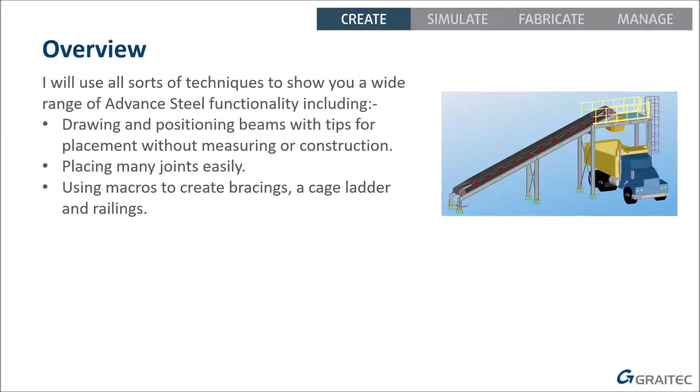You can see your base plates and bracings and various things, so I'll create all of those and show you how easy it is. I'm going to use macros to create the bracings, and use macros to create the ladder and the railings and so on. So again, large chunks of complicated but predictable geometry we can create very quickly.

Doing this whole model in its entirety is going to take around 50 minutes, give or take a couple of minutes. So I'm not going to go into a lot of depth about creating the drawings today. If you want to see more about creating drawings and things, we've got plenty of other presentations with more information on how to do that. But I will show you a quick overview of the kind of drawings you get at the end after I finish the model. So you'll see a little bit, but I won't go into it in depth.

Okay then, so let's get ready for the actual demonstration.

So this is the model that we're going to be aiming at to create. We've got the dump truck and we've got a conveyor belt taking materials, rubble or whatever, up to the top, dropping it through a hopper into the back of the dumper truck. Then we've got an access ladder to get to the top if you need to sweep down the hopper.

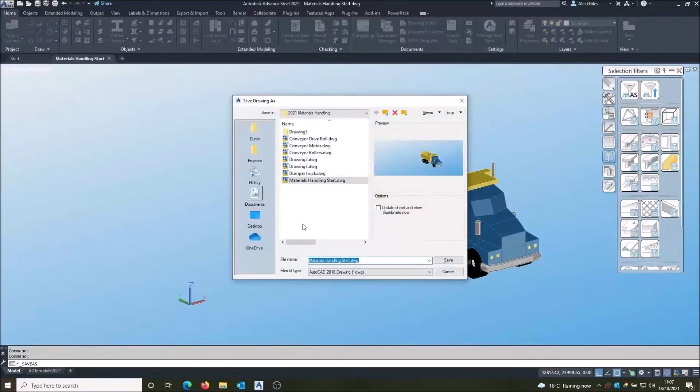So here's my starting point. I've got the dumper truck in place, and I've got my origin over here. I'm just going to do a save as there. And away we go - so I've got the construction lines in place. Let's turn those on.

So here we go. We're going to have the hopper here - these shapes here for where the hopper goes. And we're going to have this conveyor belt coming up here to drop things, rubble, into that hopper. Then we need a platform with some legs in these positions. All good.

So the first thing I'm going to do is draw most of the conveyor belt. I'm going to need to draw the sloping beams first of all. So let's get my UCS on the slope - I'm just going to use UCS at 3 points because it's construction lines, and it can't snap to an object.

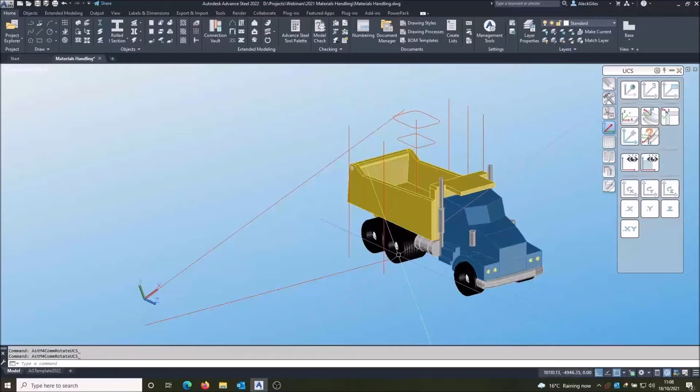And I'm going to go to the end point there, end point there - that gets my X correct. And then anything else on the plane, so end point there. Okay, that's got Y pointing down. I'd like Y to be pointing up, so let's rotate. Like so. Great, I can draw the sloping support beam.

That's going to be a big bit of channel, so I'll go straight for channel. I'll draw it from the bottom to the top.

There, because I've got my UCS all the way around. I'm going to put that on the corner, and I want that to be a nice big bit of channel, so I'm going to go for something hefty - I'll go for 300 by 100.

Now, one quirk with channels - if I put the positioning to top middle, because I want that in the middle of the flange, it doesn't go in the middle of the flange, it goes above the centre of gravity. A bit annoying, that. So I can't use that top middle position. So although I normally say never ever put a value in the Y or Z, what I'm actually going to do is put it onto the corner and then put a value in Y of -50, and that moves it to the middle of the flange accurately.

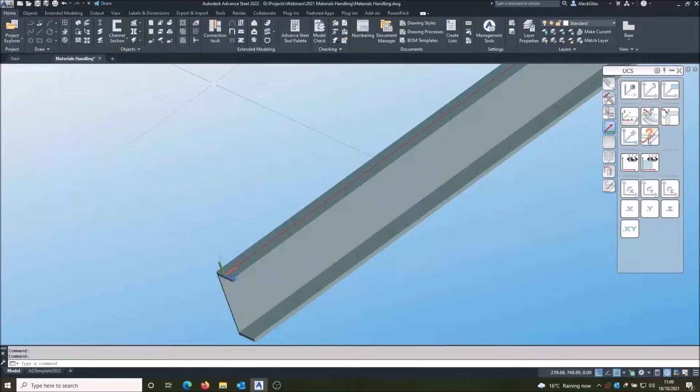Let's get my UCS the right way up. Okay. Now that's the centre line.

So we'll need to move that out in a minute. I don't know how far it's moving out yet, so let's put in my rollers. I've got blocks already prepared for the rollers, which I've nabbed from some mechanical equipment manufacturer or supplier.

So I'm going to use special parts. Here we go. I'm going to go for the top of the construction line, and I'm going to insert or browse to the block I want. And there you go, let's put the block in there.

I'll put another one at the bottom, same block, like so.

And then I want to put in the intermediate rollers. They're going to be slightly different because I want the belt to create a trough shape. So I'm going to put it at the top again because that's the only reference point I've got, and I'm going to use the conveyor rollers.

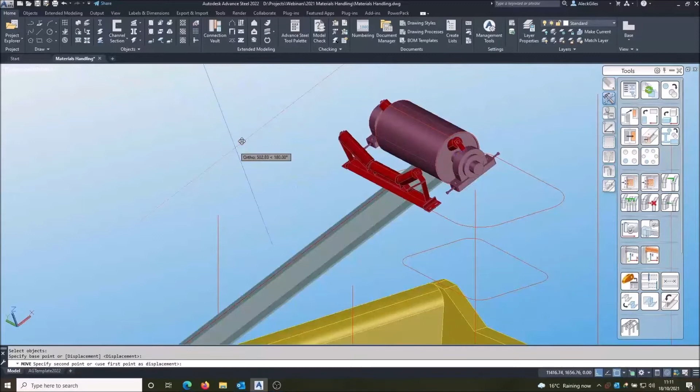So I'm going to put one at the bottom, and I'm going to move that one up 1200, like so. So that's got either end.

Now I want 10 sets of those rollers. I've got 2, I need to divide the space between them equally. So what I'm going to do is just draw an ordinary construction line, temporary. I'll go from a nice easy snap point - if I go there, I'll get the corner of the roller, or the quadrant on the corner, and I'll go to an end point there. So that's the distance between them.

I can use the ordinary AutoCAD divide command to divide that length. If I want 10 rollers, I want to add another 8 in the middle, so I need 9 segments on that bit of line. And that puts AutoCAD points along that line.

So I need to change the point to something I can see. Let's change it to a nice big symbol there. There you go, I can see the points.

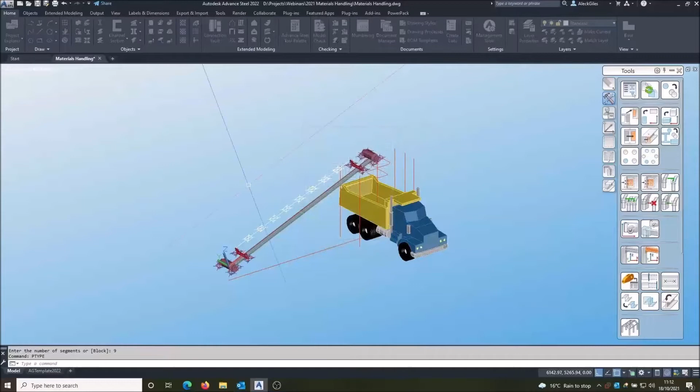So now I can copy those blocks, just use Advance Steel Copy to all those different points. So I'm going to go from the end point of that - I think I missed, let's try that again. Copy that from end point to there.

Marvellous. So now I can select those points, don't need them anymore, and get rid of that line as well. So I don't know what the gap is, but I know they're equally spaced.

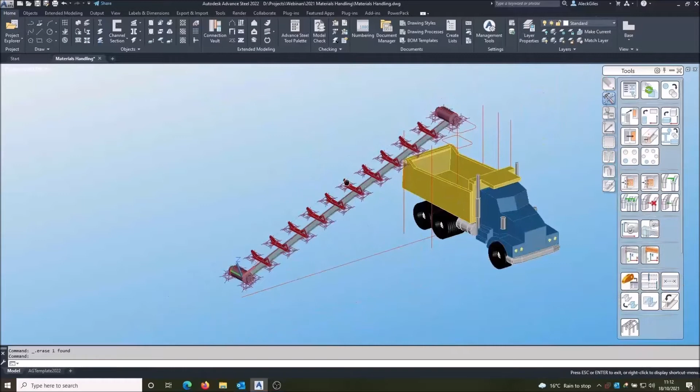Now that beam needs to move out. So I can just do a move from there to there. Needs to be a bit longer to accommodate the fixings there. So I'll move around - can I get the grip to come up?

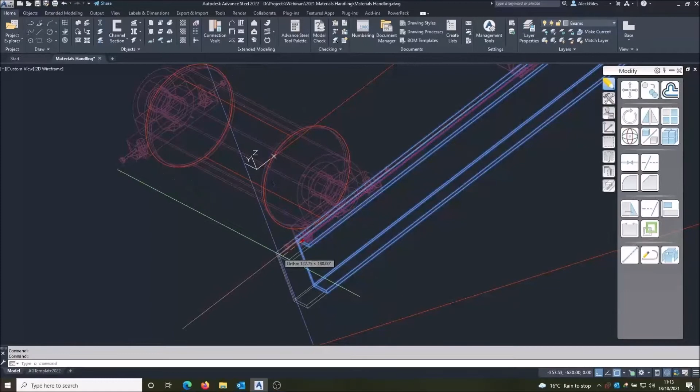No, let's go to wireframe then. There's the grip, and I'll extend it 300. And the bottom I'll extend a bit as well. That's better.

Now there's no point in drawing in the other side. I'll make everything on this side and I'll mirror it later. So far so good.

I'll bolt those rollers to the beam. That's straightforward, I just need to check my UCS is in the right position - yeah. So I can use the bolt group. I'm just going to put in one bolt at a time. So I'm going to go for a rectangular corner point, it's the easiest way.

Choose the parts to bolt together. And I've put a node inside the block - what I've done, I've put an AutoCAD point inside the block at the relevant position. That's useful to me, and then I can snap to that AutoCAD point using the node snap.

So I've got a node in the middle of that bolt hole, got a node in the middle of that bolt hole, and I've got one on the center line of the roller. So I'm going to use this node here. I just want one bolt each way, and it's going to be a chunky one - an M24.

And I will simply copy that bolt from there to there and confirm it's that block. And then I can copy a pair of bolts, center like that, all the way up to the center line there.

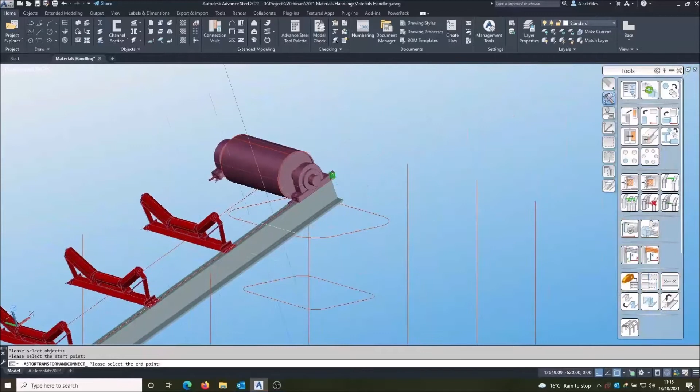And there you go, similar for the intermediate rollers. So I'm just going to do a rectangular pattern between the roller and the channel. It's going to be there, and this time it's going to be M16.

I'm going to copy that from there to there. And then I'm going to copy the pair, I'll use the bottom one as the reference. There, click. There, click.

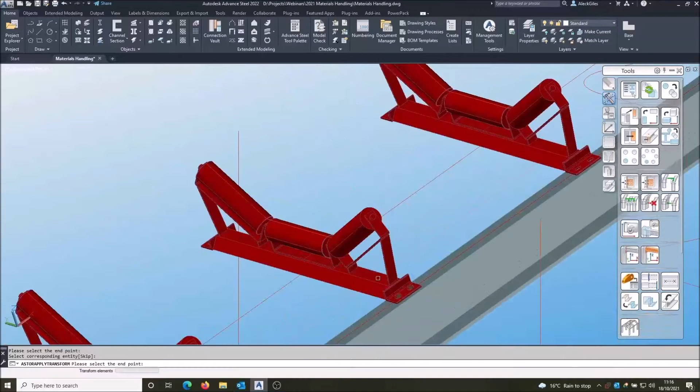So we've got half the conveyor belt in. I'm going to go back to the world coordinates now, and it's time to start putting some support structure in.

Let's reduce all those points so we don't see them all the time. Type in the command P-type, and I can put the points back to being just a dot. Okay, and that hides all those different points. It's nicer, tidier. So I'm going to put in some legs and support for that conveyor.

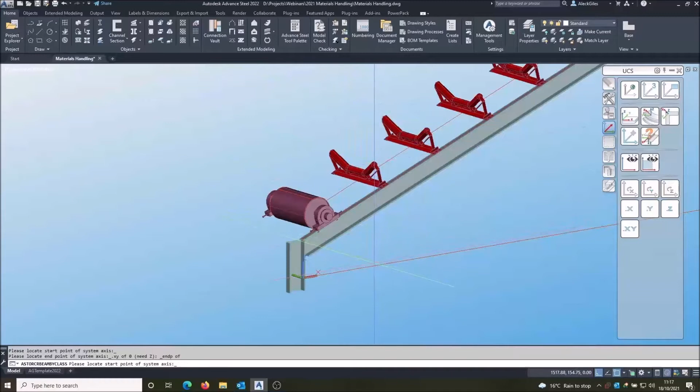So it's another leg here out of channel from the end there. I don't know what the exact height is I want to go, so how do I get it down to 0 level? The easy way is to use the Z direction, so I say dot Z - that way I'm only going in the Z direction - and then I can snap to the end point on the end of my line on the ground. Then I check all the items like positioning and so on to make sure that's in the right place.

So that one's done. I need one in the middle of that conveyor, so I'm going to do the same again. I'm going to snap to midpoint, making sure it's the middle of the system line. And again, I can say dot Z onto the end point of my floor line, and it goes down to the floor. Again, double check the positioning - this time I want it in the middle. It doesn't always remember these values, so I type them in each time. That's fine.

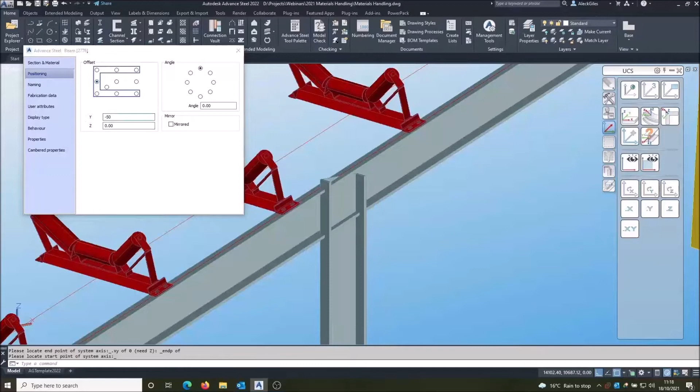Okay, marvellous. Now I've got to put some joints on them, so I'll go to connection vault. It's very easy to do the base - that's going to be a base plate. Don't worry about concrete. I'll have a 400 square by 20 thick, and that's in the library, so I'll just go to the library - 400 square, 20 thick.

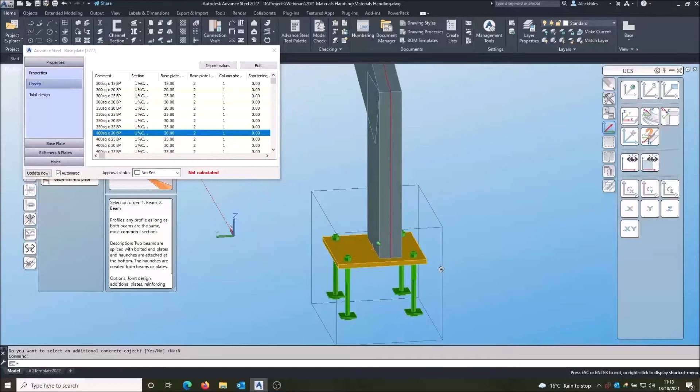300 channel, so 400 square for the base plate's reasonable. That's fine, but that's off center, so we need to get that centered. Now the default center position it's choosing is the center of the web of the channel, not the back of the channel. So I can't just move it across by 50 because that will move it the incorrect amount - it's going to still be off center.

I need to know what the web thickness of the channel is, so I can double click on the channel, go to properties, and it tells me S web thickness is 9. So that gives me 4.5 as half that web thickness. I would move it 50, but it's already across by 4.5, so 50 minus 4.5 is 45.5. So I need to move that by 45.5.

So I'm going to go back into the joint, and on the dimensions page I can offset it. Trying that one, 45.5 - okay, so it's gone the wrong direction, so it's not that one, 0 back in there, try the next one, 45.5. That's it, okay, so that's parallel to flange. Now bizarrely the bolts always seem to be the opposite one, so I'll try bolts parallel to web. There's an offset there, so I'll try 45.5 there. That's good, that's gone the right way.

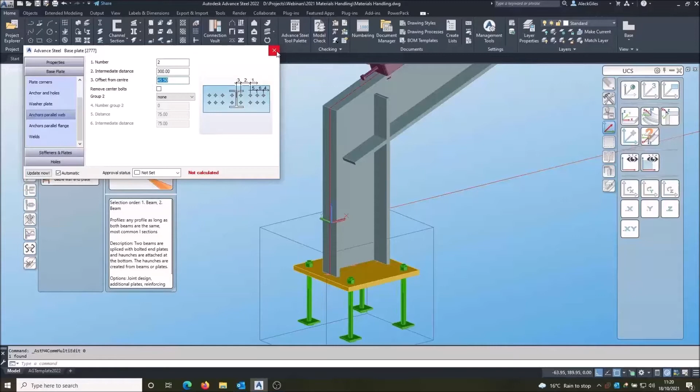So now it's in the centre, I can now do a joint copy on that one, to put it on this leg, and it stays in the centre on that leg. At the top, then we can use a nice joint called the gable wall end plate. You've got a preview here, it puts a plate underneath the cross beam on the end of the column. So that's what I want. So let's pick the beams, and in it goes.

Not quite set up right, so what I actually need, I only want one row of bolts. No, one there. I want 3 actually in that direction, and I'll change the spacing to more like 90. That looks better. This collar beam will be extended in a second, so that's decent spacing.

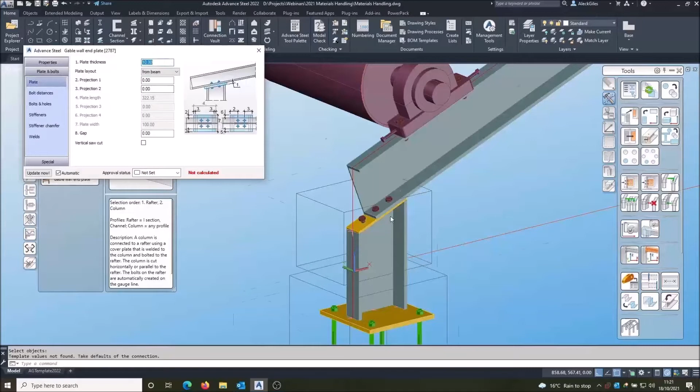I want to make sure the plate matches the size of the channel. So projection 0 all round, so it's going up to the edge of the channel.

That's cool. To get this channel right, I just need to do a cut object to make it reach the back of here. I don't know what to add or how to do it, but if I do cut object, I want to cut to the leg and I want to trim that channel. But I don't want to trim to this side, so I change the cut side to the rear, and now it extends to there.

This joint is fine, so I can do a joint copy again. Get the right piece in a minute, there you go. So copy that joint with that plate. I'll put it on this leg, so it's that beam, that leg, and let's put it in. Lovely. So that's coming on well.

Now we can mirror those items to the other side. So I'm going to go to transform elements. I'm going to say I want to select the objects. The main bits I need to select are the 3 beams that I'm interested in. In fact, I don't need to select anything else manually. I can just select those 3 beams.

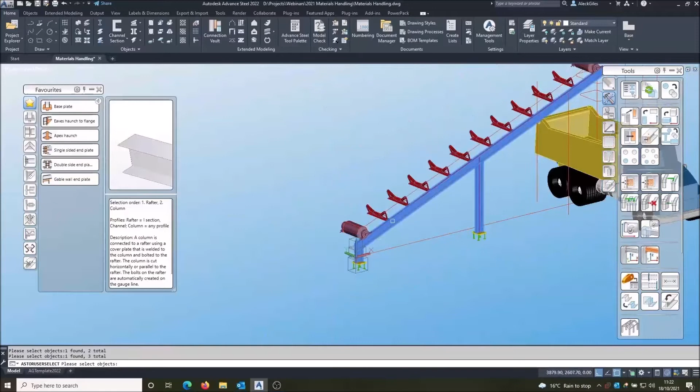And then I say include additional connections, and by doing that, it automatically finds all the bolts and all the joints that go with those beams. And then I've got to remember to make sure I say it's mirror. And because it's 3D, I prefer to use the 3D version of mirror.

My mirror plane, I've got select points on that, so it's mirror. And it'll be endpoint on the diagonal line there, endpoint on the diagonal line top, and let's go for the end point of the horizontal line at the bottom. So I think I've set that up right. I can click on the preview button, and it does the mirror. Yeah, that's all looking good.

So I can... hang on, it's asking me to confirm something. Oh, where's that beam? So I can say I want to do that one. These are going through the same members.

Being a bit touchy there. There you go, got the mirror done. So now I can say I'm happy with all that, I've had a look at it, so I can just say OK. The only thing that hasn't gone right, because we offset this base plate, it's gone the wrong direction.

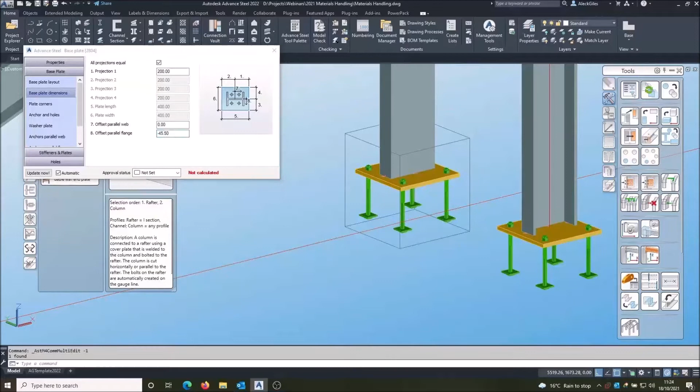So we need to go into the joint for the base plate and make sure it goes the right direction. So probably just need to make that minus. Looks like the bolts did go the right way, so that's fine, it's just a plate you need to move.

Anything that's handed goes left or right, above or below. They have a habit of going the wrong way whenever they get the chance, so you often have to flip them to the other side. It's not exactly difficult, is it? Lovely.

Okay, let's hide all those joint boxes, they're getting a bit messy now. So I'll just go to them. Wonderful, that's clear. Now we've got most of the conveyor belt.

Time to start making this platform at the top.

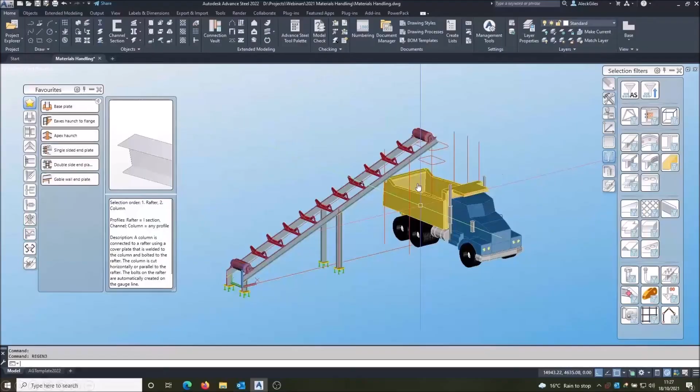So for that top platform, I have the construction lines here for the hopper, where I want to put that high enough so that it clears the truck, you're not going to bang into it, and therefore I need supporting legs around that sort of height, and I've got the legs spaced around the truck here. So I've just got some construction lines for where I need to put the legs.

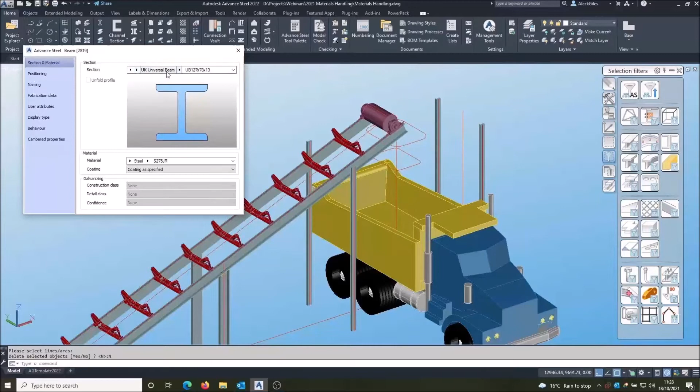So I'm simply going to do beam from line, those, and I'll just use an I-beam. There you go, and that should be in the centre line.

So that's the main legs. Now I can draw those beams around the top to hold things up. So from the ends, I don't need one across there.

Top middle. But I do want to put one either side of the hopper, so I'm just going to go from the middles.

A little bit, let's grab that grip and move it to the proper middle. And then I need to move that up beam. Obviously, I don't want it through the middle of the hopper, so I'm going to move that to one side, 700, and copy it to the other side.

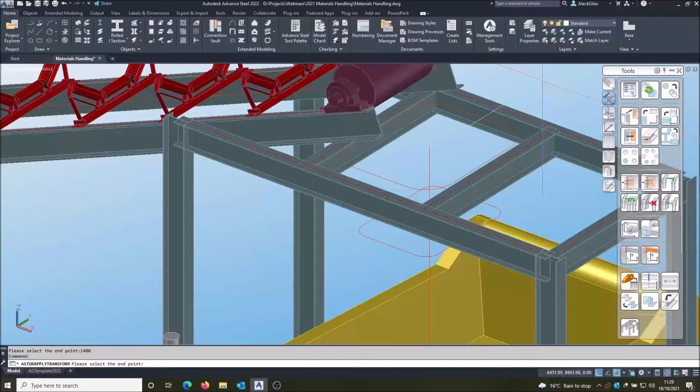So that's going to support the hopper. Okay.

So let's put some basic joints on them. Nothing particularly unusual about that. So base plates come first.

Again, I want 400 by 20, so just pick that off the list, and it will be centered, so I don't need to adjust anything this time. It's fine. So I can do a multiple copy on that, and just pick the other 3 columns.

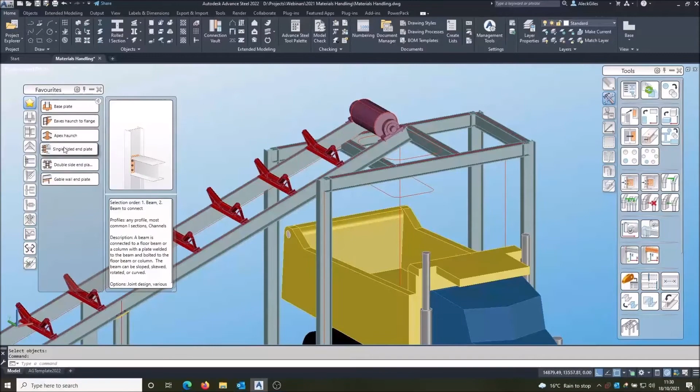Is that done? And now I want to put straightforward end plates on these beams around the tops. So single side end plate between that beam and that beam. It comes up with some default values, but I want to make sure I use something sensible.

Now the entire BCSA Green Book is programmed into the UK build, so I can just look in here for the right beam size into the library, and that will be okay, a 254 depth of beam, which is what I'm using, 2-bolt version. So there you go, it's adjusted itself to suit the Green Book pre-calculated joint.

And now I've got one of them, I can use joint copy to put the same thing on in lots of other places. So there, there. Just going around picking each pair of beams in turn. Like so. Splendid.

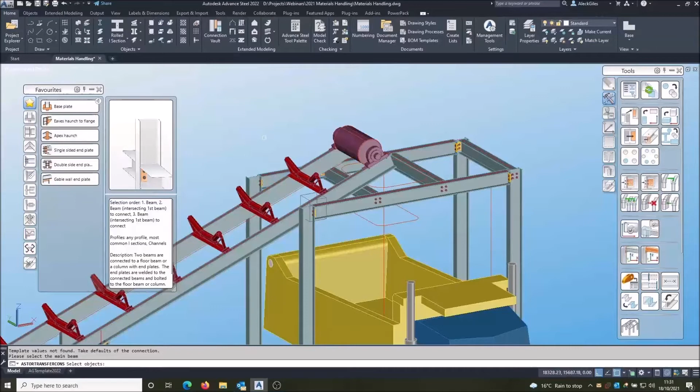And now we can draw the hopper. So the hopper is going to be made out of folded plate steel. So we've got the shape we want for the top and the bottom of the hopper. These are just 2 polylines.

We have a very simple command for doing the hopper, create conical folded plate. Tell it I want to pick a contour at the top, which would be that line, and a contour at the bottom, which is that line. And then it asks how many facets do you want in each corner. I'll go for it. There you go, just like that, it's created the whole hopper.

But that hopper is not going to float. I need to put some flanges on there to bolt these bits of I-beam. So I can simply say I want to put in a rectangular plate, and I'm going to put it on the midpoint of this edge.

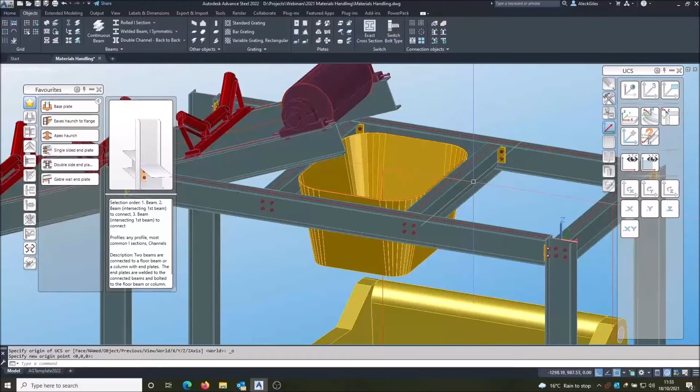Must have fumbled, let's try that again. I'll put my UCS at the top would be a good move, because that's where I want the plate, at the top, not on the ground. Try that again on the midpoint of that edge. There we go, there's a plate.

Give it the right dimension, so it needs to be 100 that way, and that'll be 800. And that should be on one side. The other side is going to be, no, that one. There you go, so that's offset it to the right side.

So now we do the same for the other side. And that'll have to be offset that way. There you go, that looks good. Marvellous, so I've got them on there.

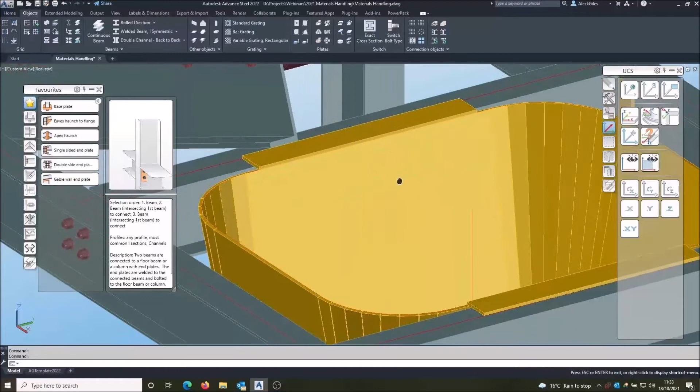Before I make them into part of the hopper, I want to put the bolts in. I don't want the bolts to be confused with other dimensions, so I'll put the bolts in now. I want to put the bolts in the middle of the overlapping area, so it's not going to be 50, because that's not going to be in the middle of the flange, I want it in the middle of the overlapping area.

So there's a tool we can use for that on the custom connections page. These little tools here are nicknamed building blocks, and they will give you a little tiny bit of intelligence. So here's bolts on a plate.

So I'm going to choose that plate as my main plate, and then I want to bolt it to that beam. I'll just tell it here I want 5 bolts in the X direction. No, other way. So 1 bolt in the X direction, 5 bolts in the Y direction with 200 spacing.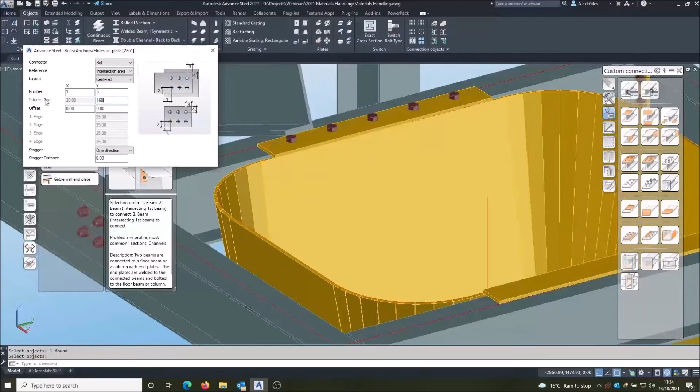Okay, let's reduce that to more like 150 spacing. That looks good. And it tells you here, look, it's based on the intersecting area, so the area where they're overlapping is what we're going to get. Let's go for 160. Looks better. Okay, that's done.

I'll do the same on this set, so it's between that plate and that beam. And again, it's 1 in the X, 5 in the Y, 160 spacing.

Now I've got them bolted on, I can merge those plates into the hopper. To do that, I want to create a fold. They're already in the right position, so it's create folded plate without position adjustment. It's that panel and that panel I want to fold together. You see how it's put a fold now across that edge.

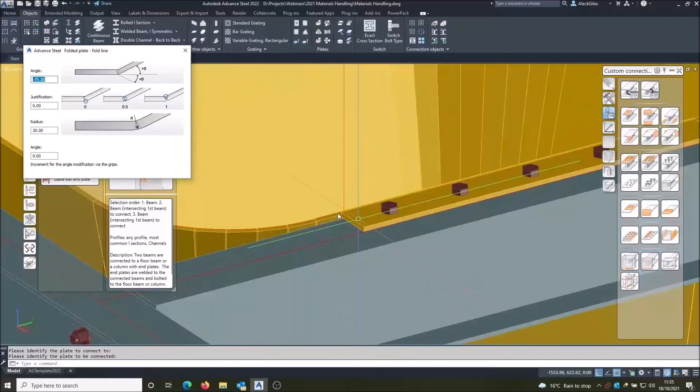I'll do the same again here, this panel and this panel. This panel and this panel, there you go. Put the fold in there to connect them together. So that hopper is now one piece.

I can even have a look at the flat pattern if I want to. If I go to properties and ask it to show me the flat pattern, there you go. There's the flat pattern with the flanges all included. So that's the hopper complete.

Now the top of this conveyor needs a bit more supporting, so let's go ahead and do that. I need to put a leg on top of this beam here. I have to figure out how to do that, how to get the right height and so on.

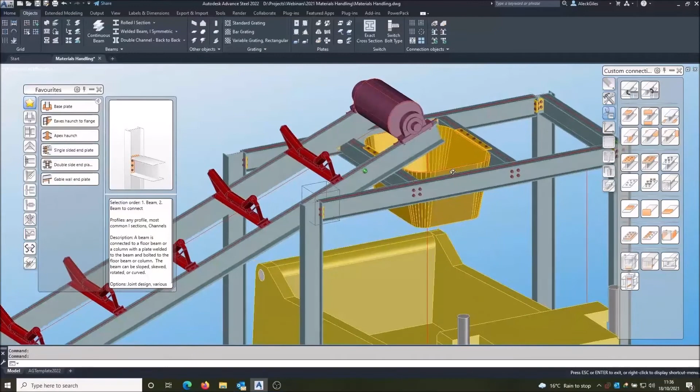There's various ways I can do that. What I'm going to do is just draw a simple, straightforward bit of channel. I can't snap to the right distance across or the right point, so the nearest snap point I've got, I'm going to use the end of this beam here. I'm just going to go up a short way. I don't know exactly how high it's got to be, so 200 seems plenty.

Get the orientation and everything sorted out. Let's rotate it and put it on the middle. And that was going to be -50, wasn't it? There we go.

Now it's got that in the right place, but it's got to go across there, not on the end of the beam. So now I can just do an ordinary move command, and I want to move that beam from where it is, the centre line there, to the centre line of that. I don't want to move in any other direction. I don't have a snap point in the exact location, but again I can use those point filters. So this time I'm going in the Y direction, to the node on the end of that beam, and it's moved it across to match the centre line.

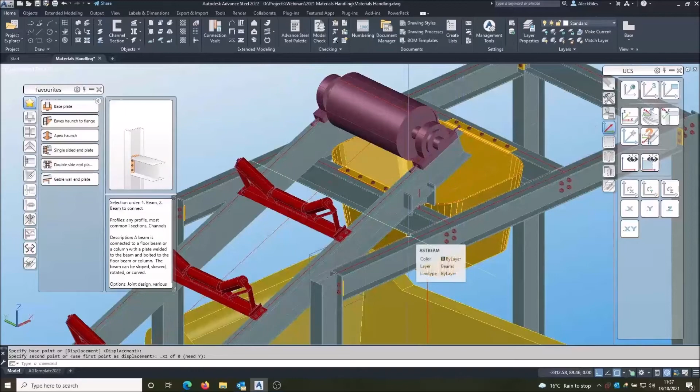Fantastic, so I've got that joint or that beam in there. Now I just need to add in the connections. I've already got one connection from down here, so I can just copy that, between that beam and that beam.

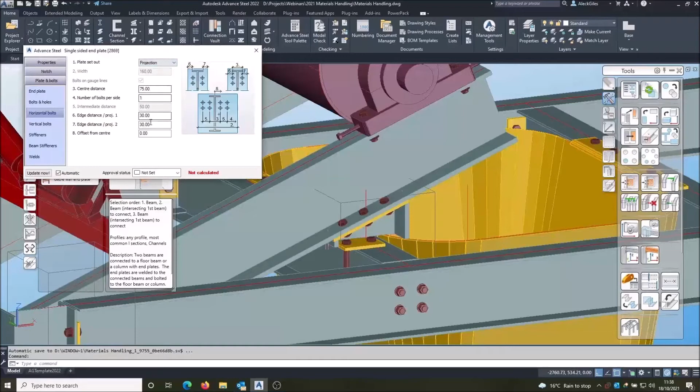Splendid. Then to the bottom of it, I'm going to need some kind of end plate, I think. So I'll just do again a single sided end plate between that beam and that beam. It all looks a bit weird, but I just need to knock it into shape. So I'm going to say I want to base the size of the plate on projection, and I want 0 projection all around, so it matches the spacing of the channel. The same vertically, so it's going to be plates based on the section.

I'm going to put it in the middle, have that be the total from the middle, and it should be 300 because it was a 300 channel. Now the plate matches the channel. The bolt spacing doesn't look very good, that's a bit too wide, so I'm going to change that bolt spacing to, let's say, 80. That looks better to me. And there we go, that'll do for a joint there. It's bolted firmly to the top of that cross beam.

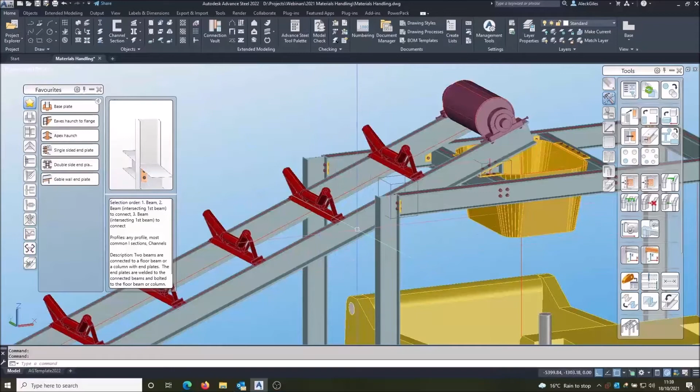Okay, so we need to do one more supporting beam. I want another beam underneath the sloping conveyor bolted to these columns. That's going to be a bit tricky to place and get it at the right angle and all the rest of it. So the first thing to do to get it at the right angle is to get my UCS on the slope. I can just place UCS object onto that beam, and that's got it at the right angle. The nearest place I can draw the beam will be the top of these columns.

So I'll go for an I-beam across the top of the columns. That should be top middle.

Okay, that's got it roughly there. Now I've got to get it down to the right height, which is going to be a little bit more tricky. So what I'm going to do is hide everything except these 3 members, so it's those 3 members I want to see, and I can tell it here to show me only those 3. Then I'm going to go to wireframe, and go to the front view.

Okay, so I want to move it vertically, so I need to have one of my axes vertical. So let's just change back to UCS on world. And now I can do a move, that beam from the top of the column.

I want to move it down to where it looks like they're going to intersect here. But I only want to move it in the Z direction, not any other directions, in case that gets confusing. So I'm going to say dot Z, so it's only going in the Z direction. Then I want the apparent intersection, because they don't really intersect those lines, they just look like they do from this direction. So it's the apparent intersection of that edge and the centre line there.

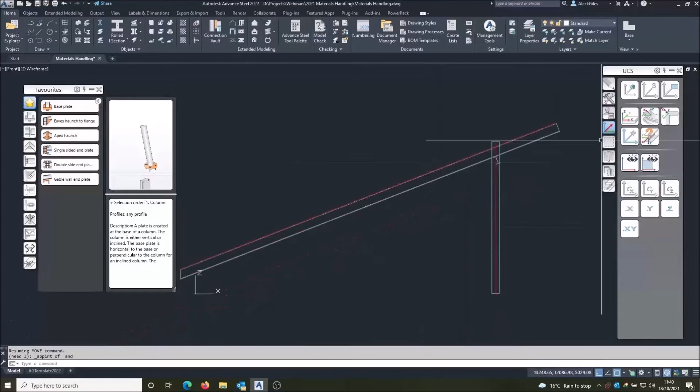So once again, I'm going to do UCS object back onto that sloping beam, and then I'll just do a move on that beam. You can see on my cursor it's telling me how much I'm moving it. So if I just move it with ortho turned on, 50, it says I'm going 48 there, that looks about right, so let's make it 50.

And that's put it in a sensible position, touching the bottom of that sloping beam. Marvellous. So now I can go back and turn everything back on, go back to realistic. The easiest way to turn everything on without turning on all the rubbish is to use the Project Explorer to show all elements. So now that beam is in the right position there.

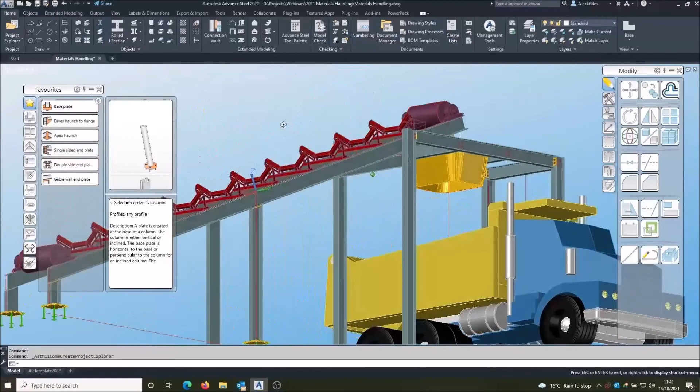So I can come in here, and I just want to bolt those 2 beams together, and a good joint for that is on the miscellaneous page called bolt on gauge lines. So I can simply use that, and I'll do that beam to that beam, and it puts 4 bolts in, or 2 bolts in the middle of the flange on each one. I'll do the same on this side, bolt on gauge lines, that beam.

Smashing. Now to get that angled or rotated beam onto the column, I'm going to go for the platform beams page, and there's various choices in here, but one that's good for this one is, let's see so I can see the pictures.

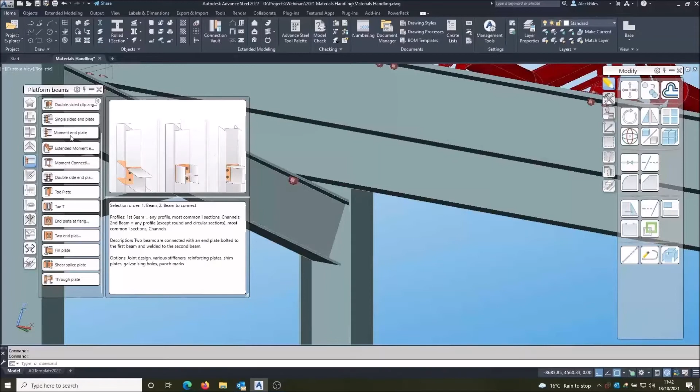That one, 2 end plates reference beam. So you can see how on the left hand picture it's got kind of the arrangement we're looking at. So I pick that, so that column, that cross beam, let's put it in there.

Now the bolts are right on the corners, I need to get them in the right places. So if I go to bolt 1, that's going to be something like 50. Yep, that looks good. And say 30 that way, that looks reasonable. You can obviously play with these numbers as you wish, but I'll take those. So I do that on all 4 corners.

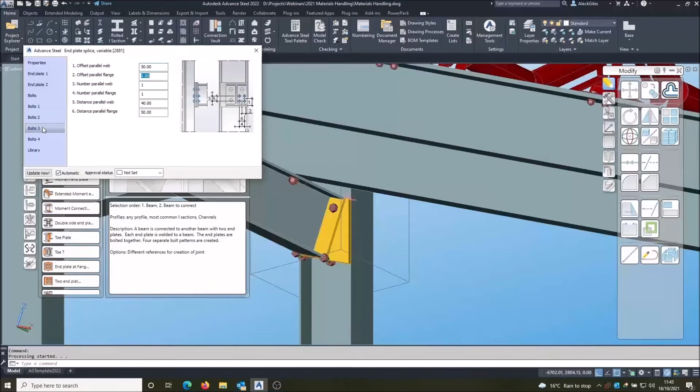Like so, and that's a decent looking joint, nice end plate on that beam. So I've got one set up. Let me make that box a bit smaller now, close that down actually for now. And I can do a joint copy again to get the same configuration on this side.

There you go, so there's joints in there for pretty much every occasion, you just got to find what you need. Sometimes you have to experiment a little bit, but that's got pretty much everything in there with all the joints. Super. Nearly done, got all the hard work done.

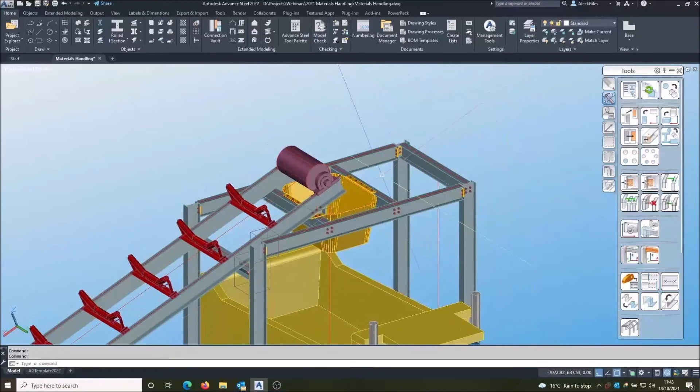Now I'm just going to make a bit more of this platform. In fact, before I make the platform, let's do the conveyor belt, be nice to show some kind of conveyor belt in there. So what I'm going to do, I've got some construction lines already drawn. To make the conveyor belt, I'm going to use a combination of folded plates and folded beams, and I would need construction lines to show me the shapes I want.

So I've drawn a construction line, you can just see it in red there, down the top of the rollers and across there, up this side and across the top of this roller, and so on.

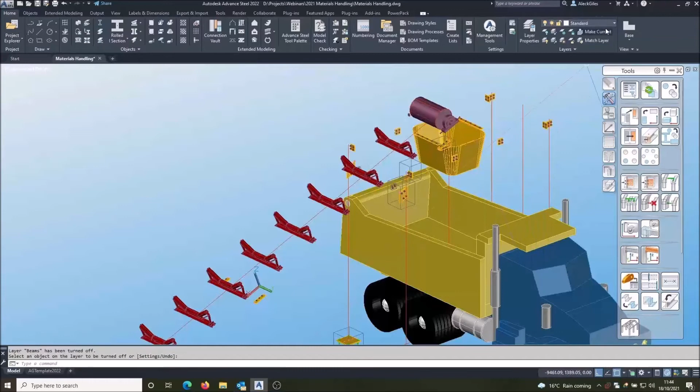So what I'm going to do, I'm going to hide the layer for the beams, hide the layer for the special parts and everything else. Let's just turn them all off, so special parts turned off, and the other construction lines can go off as well. I just want the construction lines for the belt turned on.

I can turn off the bolts while I'm here. Let's just keep the display clear. There you go, that's nicer.

What I'm going to do is put myself on the layer for concrete, because we haven't got a layer for rubber belts, but the concrete kind of looks a bit like a rubber belt. So I'm going to use the layer called concrete footings, and then I can turn the plates layer off as well.

Let's hide those joint boxes. Okay, so now I've got a fairly clear screen.

So you can see this line I've drawn. I drew down the roller, across and up. I've got another one there, and around and up.

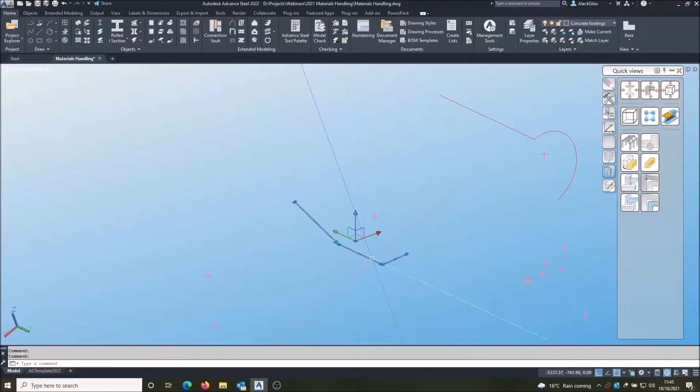Now I can't use those lines because they're part of the blocks, so I've drawn new lines on top of the blocks. These ones are just lines - that's just a line, that's a polyline, and that's an arc. So like I said, I'm going to use a combination of these things.

First thing I'm going to do is draw the bit wrapping around the roller at the top. I'm going to use a folded beam for that. Let's go back to - that's fine, folded beam, and it's an arc I'm going to choose.

So it's that arc, center of the system line, my reference point - I'm going to do the end of that line, and then I'm going to draw it actually going from the end of that line to the other end of that line. And there you go. I only want that 5 thick for the belt.

Let's say the material should be other. Do we have rubber in the list? There you go, rubber.

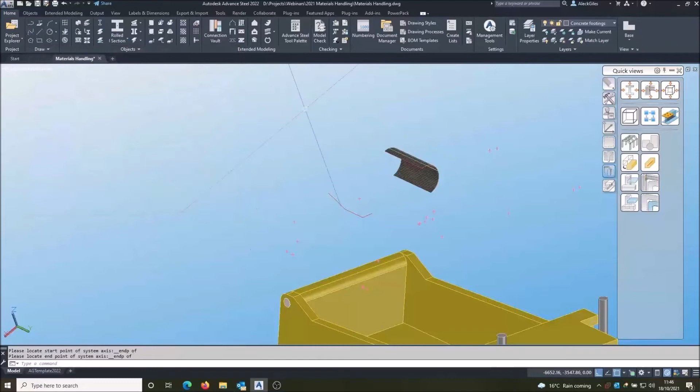Now, so that it doesn't get in the way when I'm trying to choose other things, I'm just going to hide that. And then I'm going to do the next segment. So to go from that straight edge on top of that roller to the trough shape on the other rollers, I need a twisted folded plate.

Here we go. That's going to be simply from that line to that line, and I want it 5 thick. There you go, just like that. Again, I'm going to hide that so it doesn't make it difficult to pick the next bit.

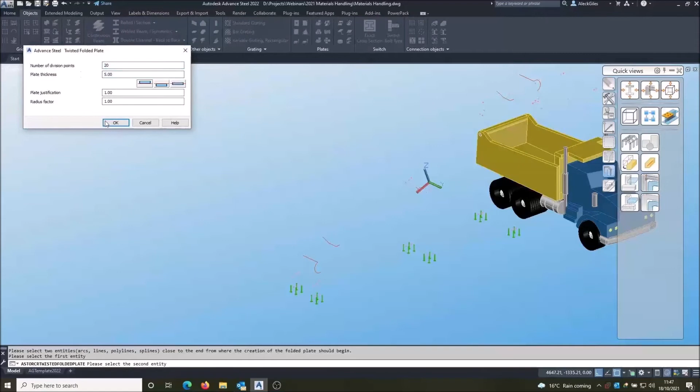I want another twisted folded plate, which is going to go from that top roller down to the bottom roller, 5 thick. Like that.

I'm going to do the third one for the transition down the bottom.

And do another bit of folded beam to get the curved bit. So again, that's based on an arc - it's that arc, and the reference point is the end of that line. And now I'm going to go from the end of that line to the other end of that line. That's 5 thick, material rubber, and select that, hide that.

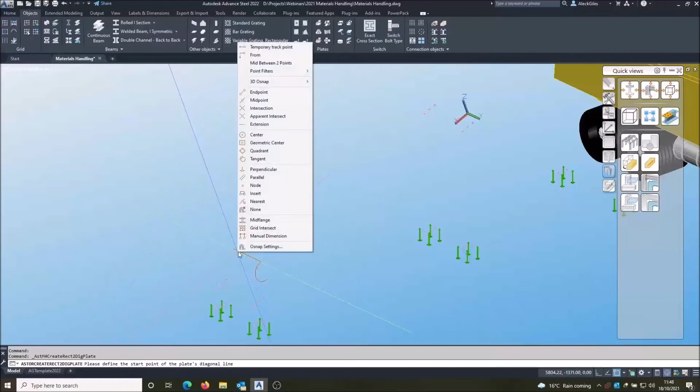The last one I want to do is going to be a simple straight bit going up the other way. So that's easy, I can just do that as a rectangular plate, 2 points from the end point of the roller there to the end point of the roller here.

Let's not put it at the right height - make sure it's 5mm again. Change the material to rubber again.

I know it's not at the right height, so I just need to move it to the right height. So simply do a move, that part from the top there to the end point on that construction line there.

Right, so if I turn all those back on, just use the Project Explorer, bring everything back - all layers on.

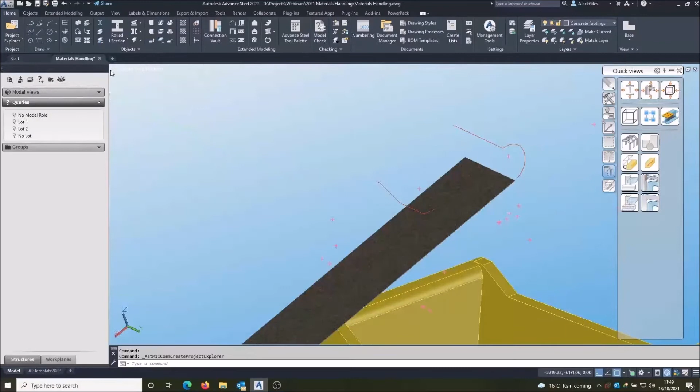There we go, you can see I've got that rubber. It's not perfect, I know, but it gives you a nice representation of that conveyor belt wrapped around those rollers.

Now I want to do some bracing on that conveyor, I think I need to put some bracing on it to strengthen it. I've got my UCS already aligned with the conveyor.

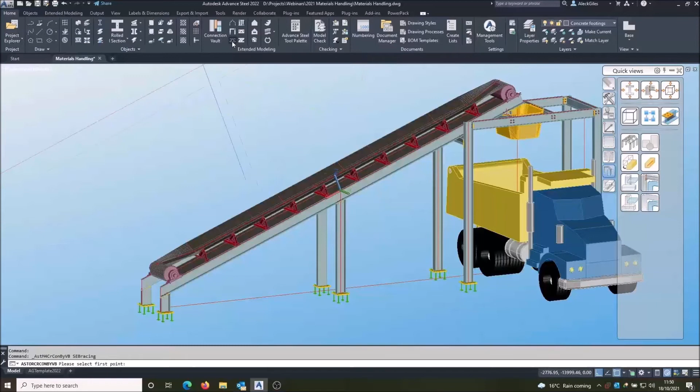All I need to do is go to the bracing macro, and I can go from the end of the system line there to the end of the system line there.

Trouble is it's hiding it inside the rollers. So what I'll do is move it down so we can see what we're doing, and I'm going to hide that layer with the conveyor belt.

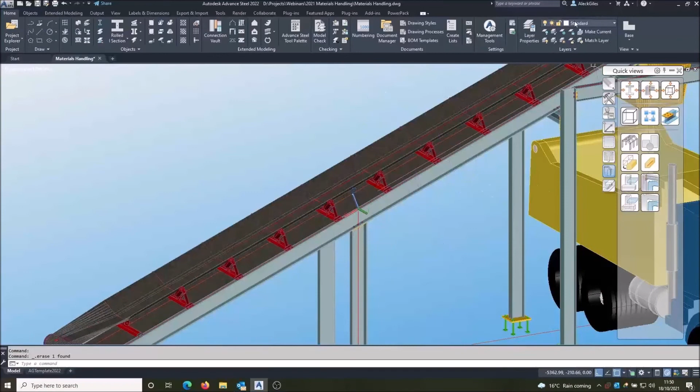Let's put myself back on the standard layer. I just did that bracing on the wrong layer, so I'll do that bracing again in a moment, and let's hide that so it comes up on the right layer.

So from that to the node there - there you go, you can see the bracing now in the middle. I want to change all that.

If I go to the geometry page, I can adjust that. I actually want 3 X's going up the length of the conveyor. I don't want them to be that chunky, so I can reduce the size of that angle - 60 by 5 would be plenty. That's got the rough geometry.

But I don't want it on the top face, I need that in the middle of the conveyor. So all I need to do is do a move, and you see this white frame - this white frame controls that bracing, so I just need to move that down.

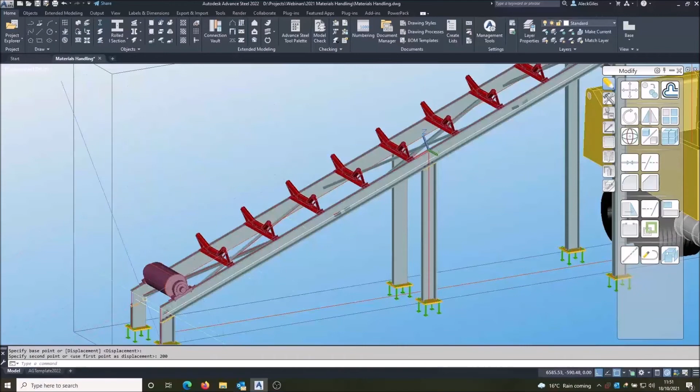I want to go underneath the belt, so I'm going to go down in the Z direction 200. There you go, let's move the bracing down now towards the bottom. It looks good at the bottom - now how close is it getting at the top?

A bit too close at the top there, so let's grab that frame and I'll move that edge down. Making sure I'm moving in the right direction, so move that down that way - I'm going to go down, let's say 300, making sure it's clear of the roller.

Looks nice at the bottom, I can live with it where it is. So just double check the spacing, make sure these are all equal length.

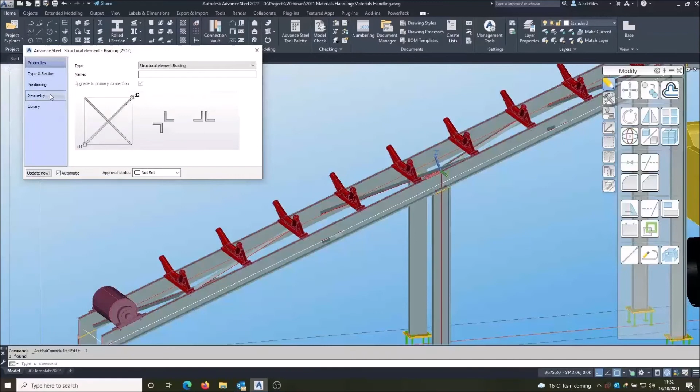When you adjust the length, you have to tell it to update the spacing in the field, so I'll change that to 2 and then back to 3. And it recalculates where the midpoints are so that the spacing and all those bits of angle are the same length.

Now I need to put a connection on that angle, and we have the suitable ones in the library already, so just go for bracings - it'll be gusset plate at one diagonal, so it'll be that channel to that angle.

Looks a bit odd like that, don't want that long slender bit, but that's just because I need to adjust the setting. I'm going to change that to 2 - now that looks much more sensible.

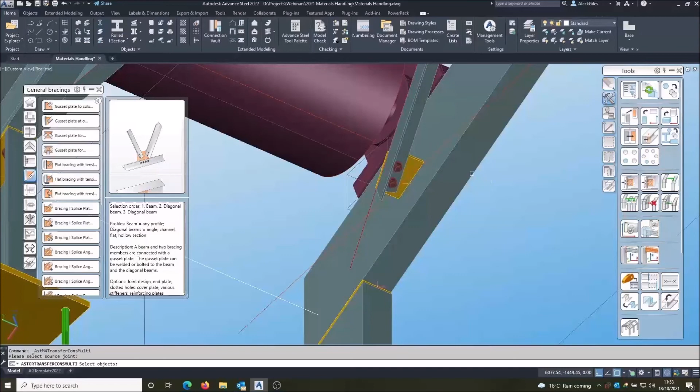Happy with that? So I can say joint copy multiple. I have one of those, and I need to go for that beam and all these diagonals.

There you go, let's put one on either end of every bit of diagonal. I would have actually put an extra one on the bottom here, I know that, so I'm just going to select and delete the duplicate one there.

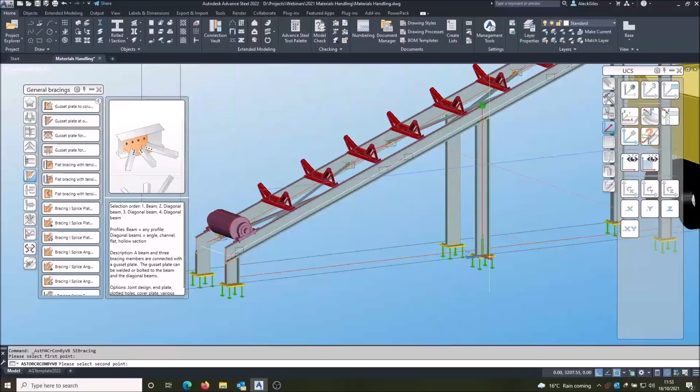Fabulous. I want to do the same for the legs here, so I will simply adjust my UCS, and then I'll use that bracing macro again, from the bottom there to the top there. Now it's obviously going up through the conveyor, through the channel, because it's going right up to the system line.

I don't want to do that, so I can tell it offset from the bottom would be 50, offset from the top maybe 500 - that moved it down a sensible amount to there. It's fine, make sure I put it in as the right size of channel and angle. Wonderful. Now I can use the same joint I've already got.

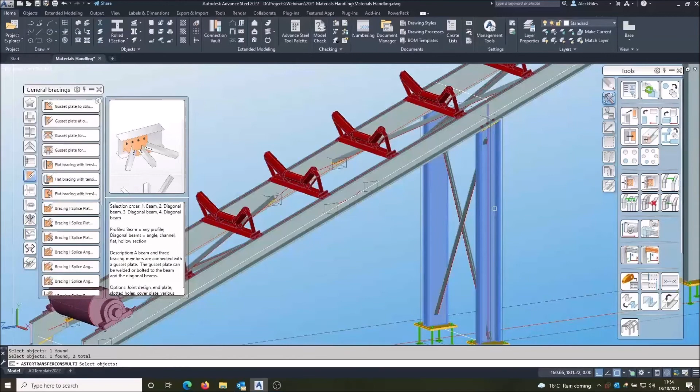So I have one of those. Let's do a multiple, one of those, and I'll have it on those channels and those 2 bits of angle. That's the 4 corners taken care of.

To give it the full strength, I need to bolt those bits of angle together. So at the bottom of that page you have direct bolt between those 2 sections, and just need to set these distances to half the flange. There you go, the bolts in the middle holding those 2 bits of angle together.

I want to do the same on these other legs, so I can move my UCS to those legs, and then I can say I want all the same parameters, so I'll just use joint copy.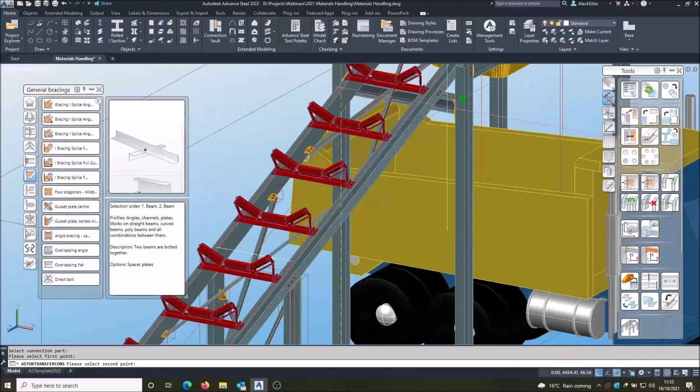Don't go all the way up because it will go through the beam, so I'm just going to go to the end point of that beam, that will be fine. That's taking it to there - marvellous, that looks good. Then I can do a joint copy multiple for the gusset plate.

Super, and then I'll do a joint copy for that direct bolt. And that's done, so that's the bracings done on 2 sets of legs. There's all the bracing I need now. Let's put the layer back on. Bracings underneath the conveyor belt now.

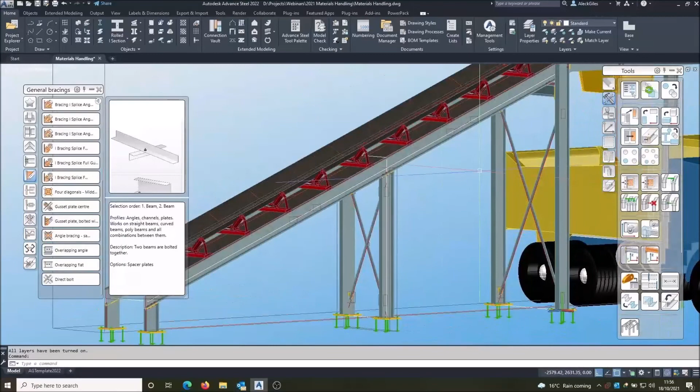Looking nice. So now the last things I need to do are finish off the platform at the top. Let's clear the screen a bit. Now I can simply put a bit of grating on the top here, so I'll go for a bit of rectangular grating. Put my UCS in the right place first.

Put my bit of grating on, like so. I could bolt it down, could do other things, but I won't bother with that today. Plenty of other presentations showing you that.

I want to put a cage ladder going up this centre line. So make sure my UCS is pointing in the right direction. It's important you get that in the right direction to get the cage on the right side. And I'll ask for a cage ladder from the end point at the bottom of that construction line to the top of that construction line.

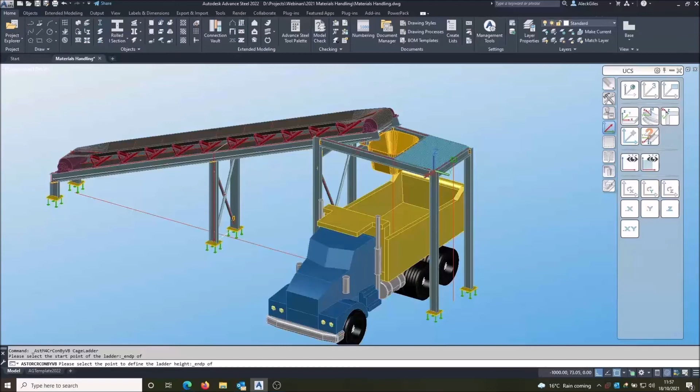It's put a ladder in, it's not the right ladder yet. There are lots and lots of things we can play with in here about everything to do with the ladder, the shape of the cage, the spacing of the rungs and everything else. You can store your favourite settings in the library. So rather than watch me play with umpteen different parameters, I've already stored what I want in the library.

So just select it from the library, and after a little bit of thought, there's a lot of parts to remodel. There you go, it's created the ladder with the right dimensions. Now it doesn't do the exit cage very well, so what we need to do as a workaround is just draw another ladder nearby with all the right dimensions for the exit cage.

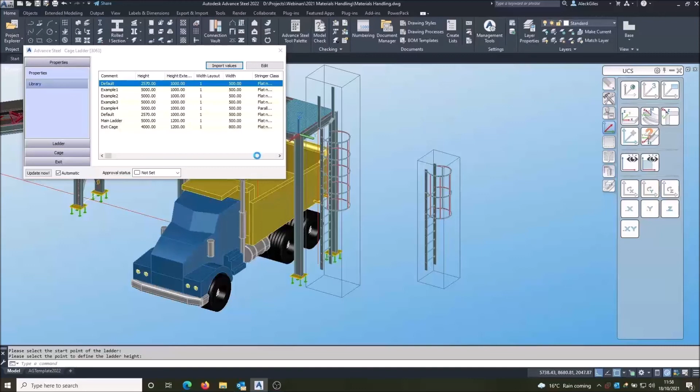So I'm just going to simply choose my exit cage library entry, like so. And then we can copy those exit hoops onto the main ladder, so just literally use the copy from here. 1, 2, 3, from the end of that stringer to the end of that stringer.

Lovely, finish that. I need to make these stringers go up to the top, so I can use the trim and extend, the advanced trim and extend. I want to go extend. I want to go to the face of the beam, and I'm going to go to this beam, and these are the ones I want to extend. That one, that one, that one, that one, and that one.

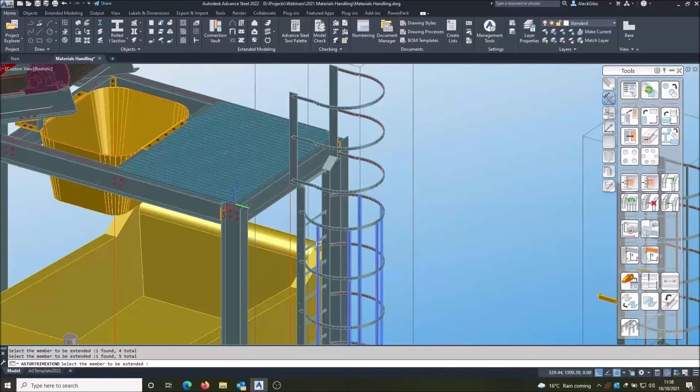Okay, that's extended them to the bottom, but I want it to go to the top, so if I select them again, I'll extend to the next face, which is the top face. Now they're all extended up to the top face, and I'm finished. So that ladder's all now one fabrication, like so. So I can get rid of this dummy ladder over here.

That's my ladder done. Last thing to do is put the railings on. So we have a macro for the railings. There you go, so I just need to go on this beam and this beam. I'll start at the end of the stringer there and go to the end of the beam there. Don't need to select a nosing point.

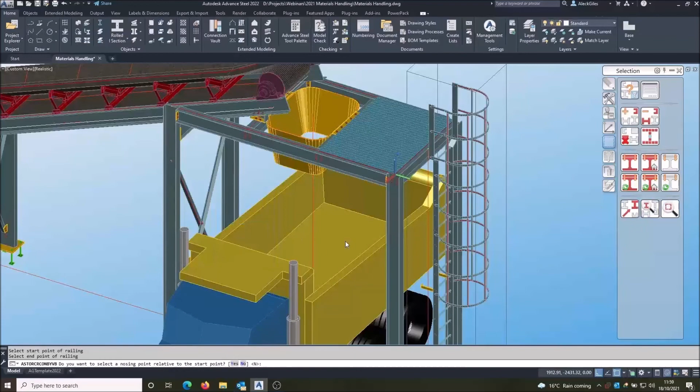Okay, that's a start. So let's just make a few simple alterations. I don't want a mitre in the corner, I want a curve, so I'll change that to a radius. And then on the end there, I need a bit of a loop so you don't hurt yourself on it, so I'll just change that to loop. I don't want it sticking out because that's going to close the gap down, so I'll make it no extra length.

Then we need to bolt that to the I-beams. They're on the centre line at the moment, so we need to move it out. So I'll say I want to move it 50. There you go, that's now on the outer flange. And to connect it, I'll put plate with bolts, and I just want one line of bolts.

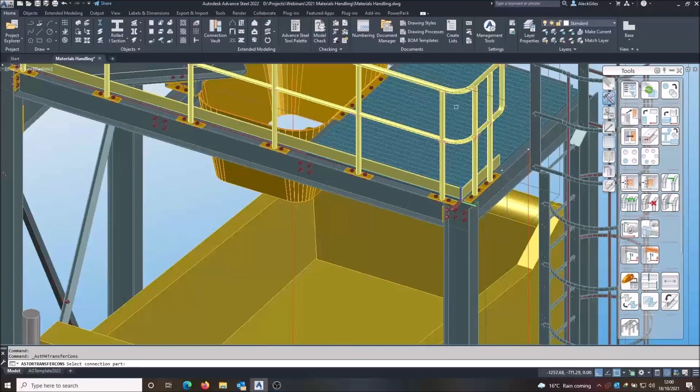Okay, now we could obviously adjust that further and mess about, but you get the idea, that's close enough. So we've got one, and I'm going to copy the same railing, same setup now. So it's joint copy, same railing to the other side, so it's that beam and that beam, starting here, ending there.

No nosing point. That's lovely. It's just put it on the inside, so all I need to do is just edit that and move it the other way on the offset.

So it'll be a -50 offset. That's back on the outside again. Close that, and there you go. Just hide all the rubbish and turn off my construction layers.

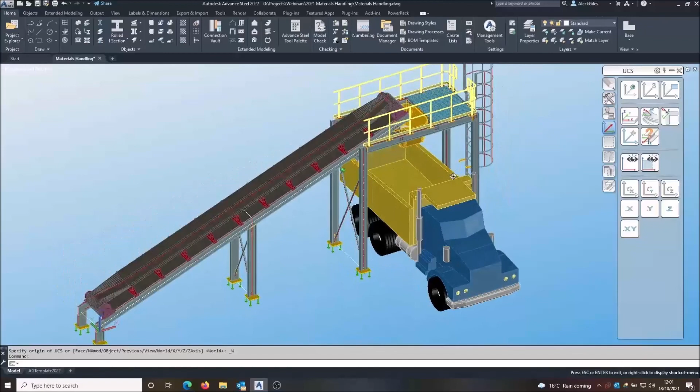Move to world coordinates. And there you have my sloped conveyor belt, to carry the rubble up to the hopper. It's going to fall through that cone-shaped, tapering hopper. Got an access platform with a bit of grating, cat ladder, and railings, so should you need to access the top there against the roll or do anything else.

So I'll save that, and that's complete. Thank you very much.

Okay, so we finished the model. And as you can see, Advance Steel is capable of modelling pretty much anything you like. The modelling commands are versatile. You can apply them to whatever type of structure and supporting steelwork you need. You've got good plate tools and so on, and macros to automate many common arrangements.

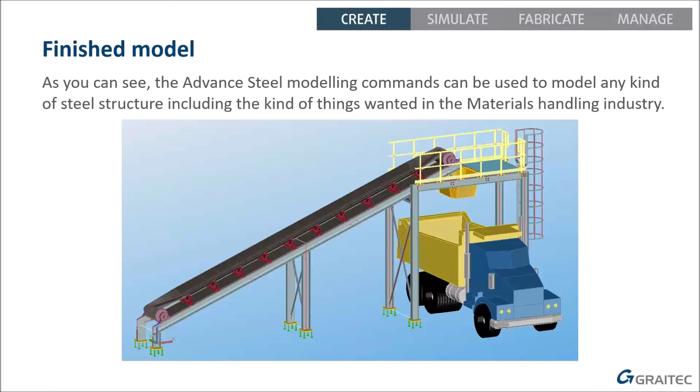So the kind of things you might need in the materials handling industry, you can model your kind of structures, conveyor belts, platforms, access ways and so on, just as easily as it can model other buildings or fancy stairs and railings.

So I said I wouldn't go into a lot about the output, but obviously the model itself is not the end goal. We need to produce some kind of output, drawings and so on, for manufacture.

So obviously we can create all the output you would expect. We get full sets of drawings, part drawings, assembly drawings, general arrangement drawings, bills of materials, NC files, all automatically. I produced some from this model myself, preparing, so we can see how long it takes.

To do that process, you need to assign model roles to the members in the model, number the whole model, produce the drawings, and maybe touch them up a little bit or just check a few things. Overall, that took me about 15 to 20 minutes to do that, straight off from nothing, to a full set of drawings and things.

And that included this GA drawing. So you can see there I've got 3 main views, and I've got a close-up of the hopper. So you can have 3D views, orthographic views, whatever you wish.

Some assembly drawings, so you can see I've got the railing on the top there, and at the bottom I've got one of the columns. So they're produced automatically. That's totally 100% automatic, nothing doctored, nothing edited on those drawings, just as it comes.

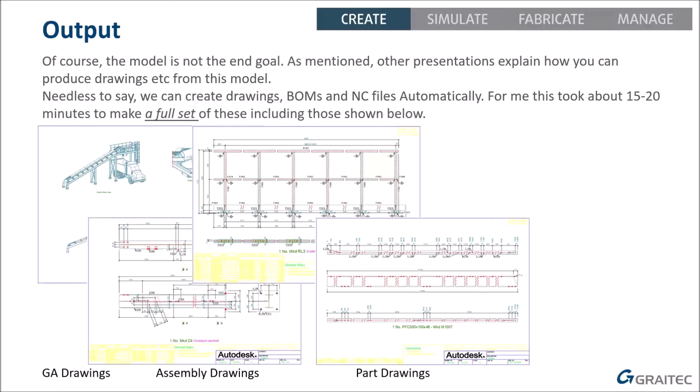You can get individual part drawings for any given part as well. So there's one of the supporting beams supporting up the rollers.

You can get your bills of materials, so you get lots of different formats for bills of materials. That's just the standard material list there, just lists all the beams and plates. And the NC files to go with those for manufacturing with NC machinery. So you can get everything you need.

And like I say, to do the full set took me about 15 minutes, give or take a little bit. There's plenty of other demonstrations that will show you how to do all that in more depth, of course, how that process works. The focus today was on how you could apply the modeling techniques to different types of structure.